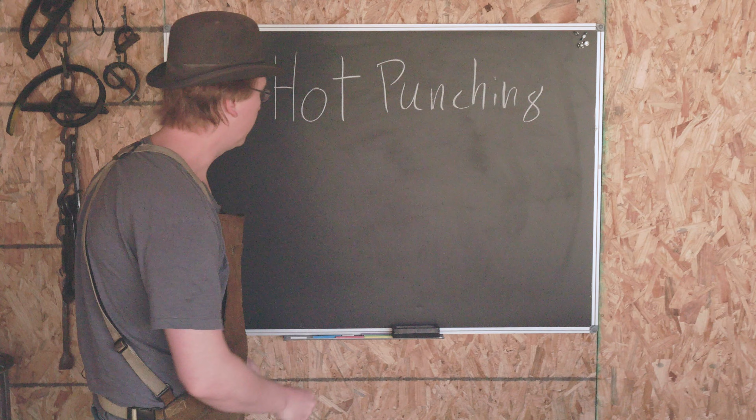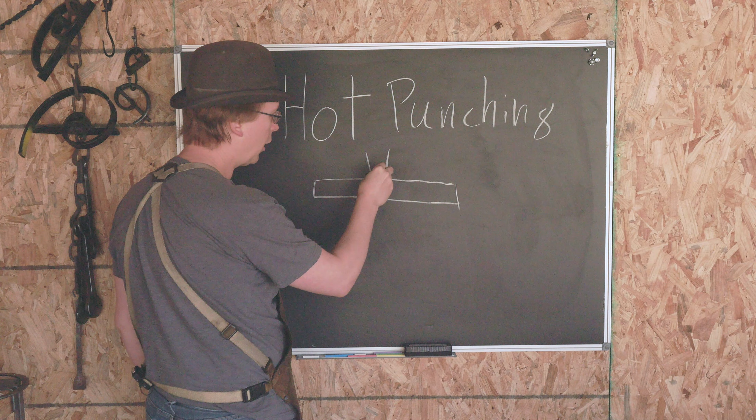So let's take a look at what's going on when we do hot punching. We've got our bar, looking at it from the side here. We're going to come in with our hot punch and shove this material down, all the way down like this.

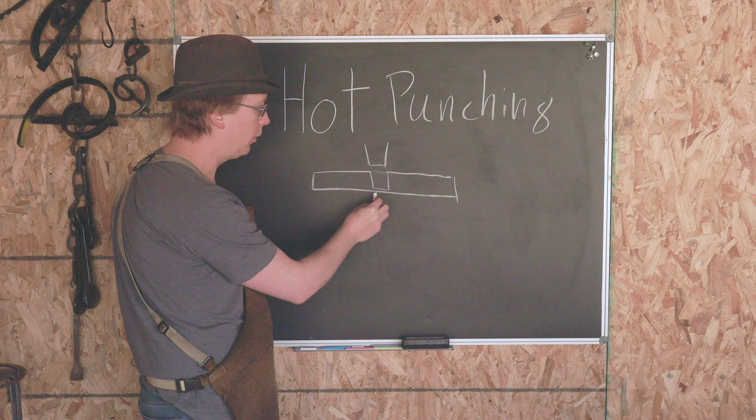Most of this material gets pushed out to the sides. A little slug will be trapped down here at the bottom. What we want to do is hammer all the way down, if we've got our anvil here, until the hot punch is basically hitting the anvil.

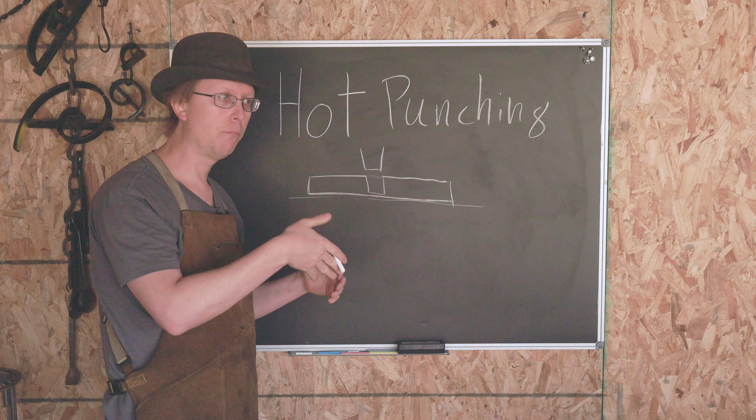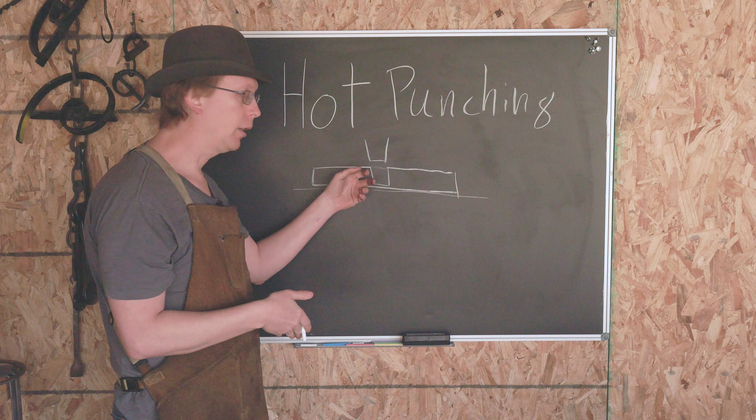When you're doing this, you'll feel like the punch is no longer moving through the metal when you hit it. It will also sound more solid, like you're hammering your punch straight into the anvil rather than into the piece of hot metal. So those are the kinds of things you want to listen for.

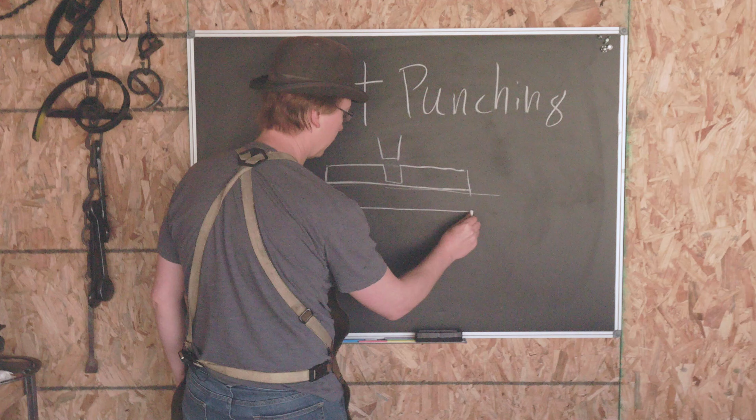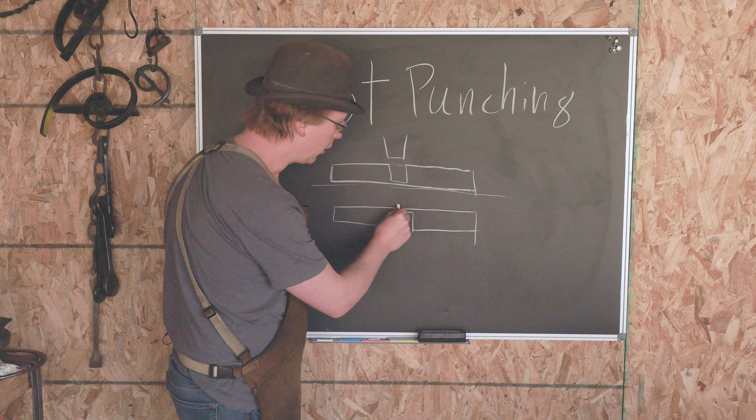Once you've got it to this stage, we're going to flip it over, like this. And then we come in the other direction with our hot punch and push this slug back this way. It's nicer if you do this while the bar is a little bit cooler.

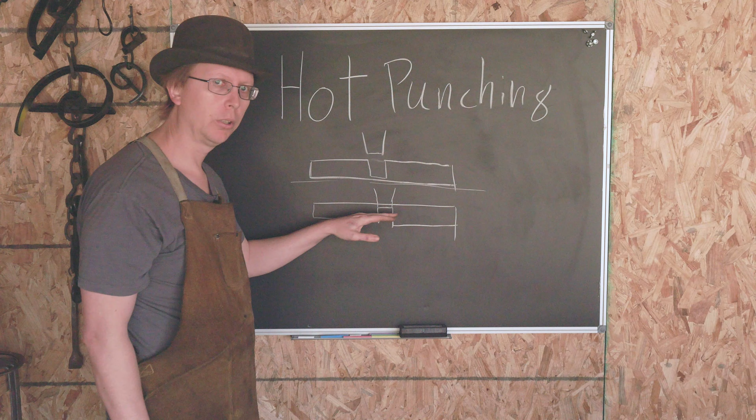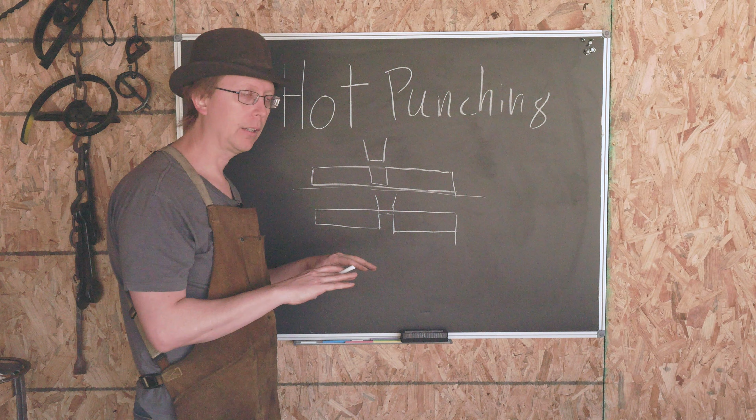What you're looking for here is really kind of a shearing action so that the metal breaks away. If you've got it really hot, it'll stretch more and be a little bit more ragged. So when you're going through the second side, if it's down into a red heat, even a kind of hot black heat, you're going to be okay to knock the slug out.

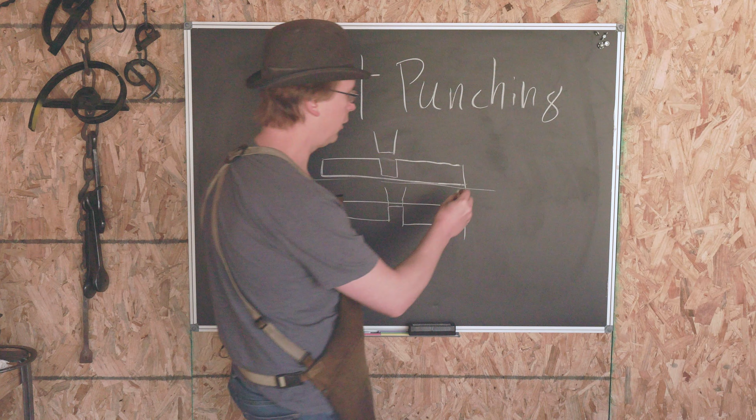Where this can go wrong, if you do it unintentionally, is really when you wind up with this situation. So we've got our bar, we come in, we push the material down, we flip it over.

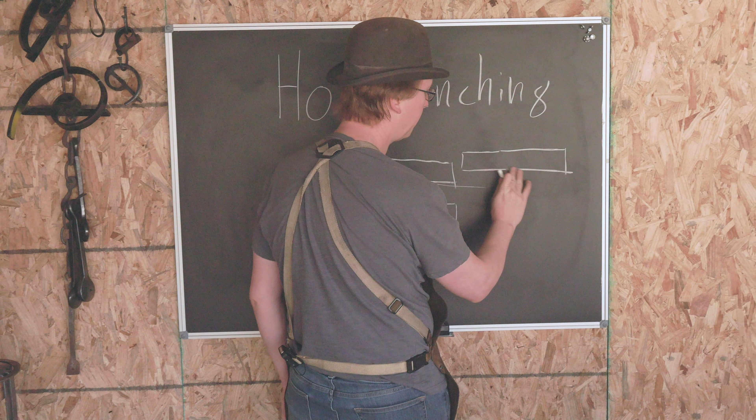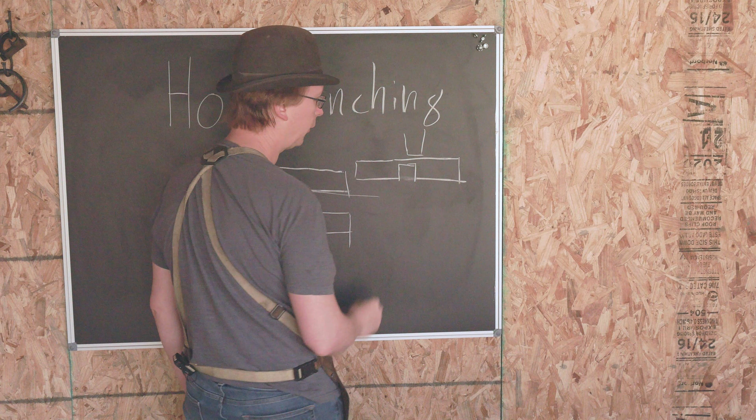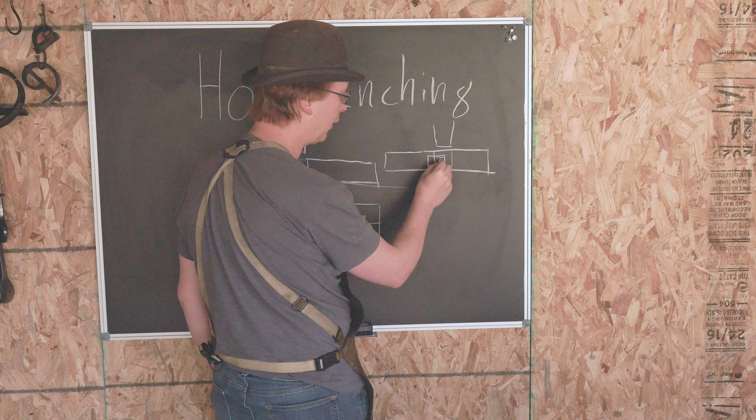So we've got this situation, and then we come in with our hot punch and we're off center. Now we drive this down and it pushes this portion of the material down and kind of this slug, and things get ugly in here. It gets kind of messy, and your hole is not very straight. If you're not meaning to do this, it's a mistake.

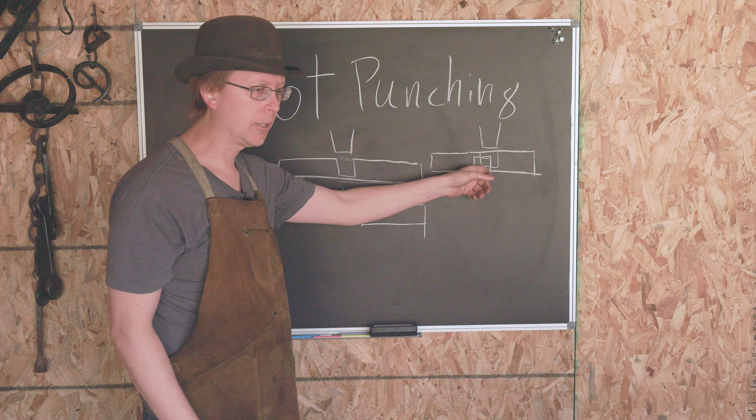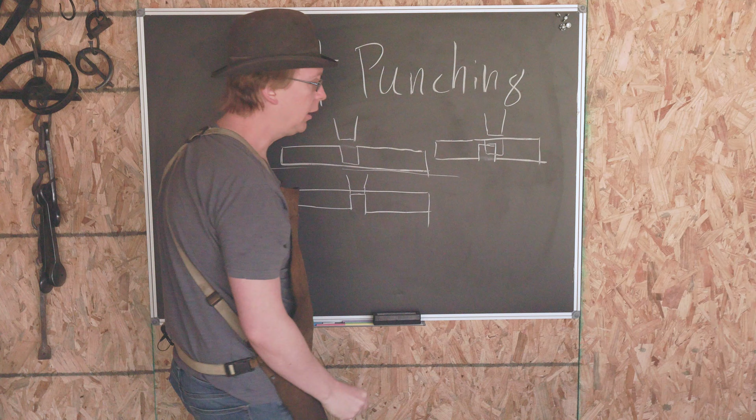If you are looking at passing a bar through at an angle, like if I want to come through with something this way, this is actually a technique you can use to establish angled holes. But for this, and what ABANA is looking for in lesson 2 here, is just a straight hole through.

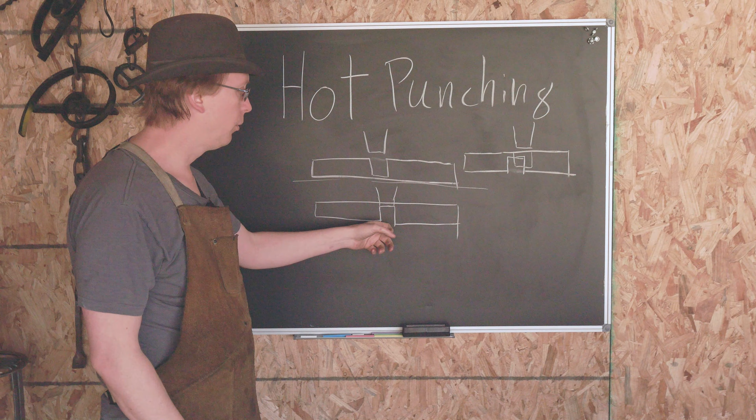Once we've got that hole established, we're going to use a drift to drift it out to 3/8 of an inch size. I'll talk to you guys a little bit about drifting when we get to that stage. But this is the basics of it: hammer all the way through to the anvil, flip it over, go through the other way.

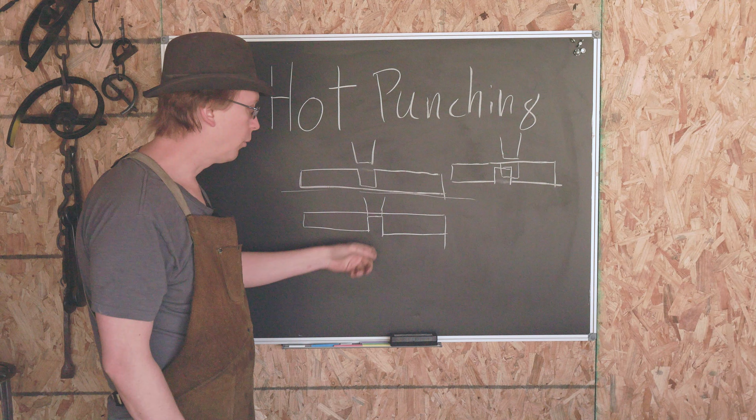When this gets back down to here, you will want to put this over the Pritchel hole in your anvil so that you can knock it through.

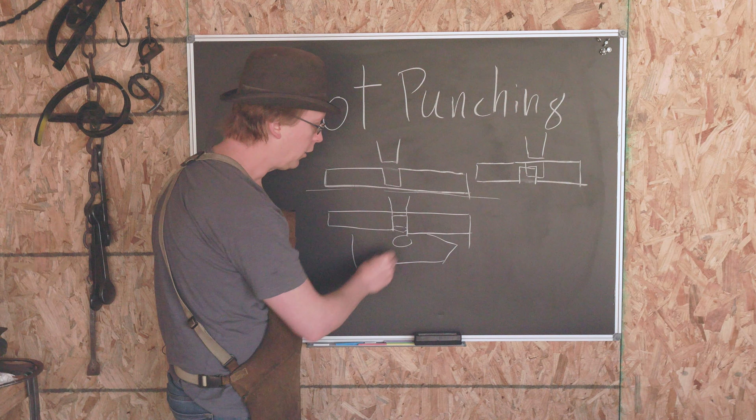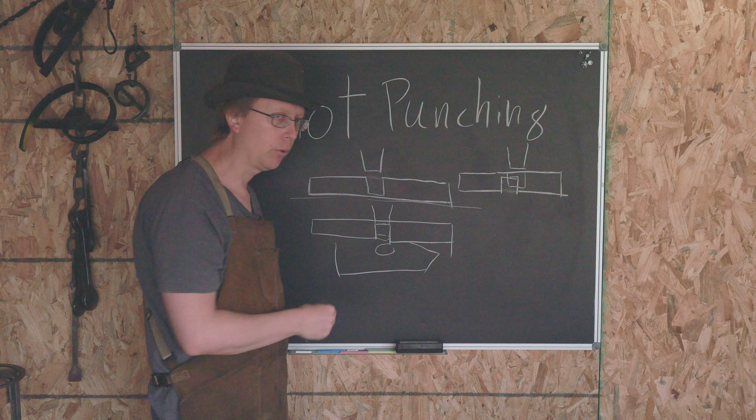One very important note: you don't need this for the hot punching, but for the drifting, you'll need to make sure that your drift can fit through your pritchel hole. For the hot punching, it should fit through unless you're using something that's really a crazy size, because your punch is not going to go all the way into the pritchel hole.

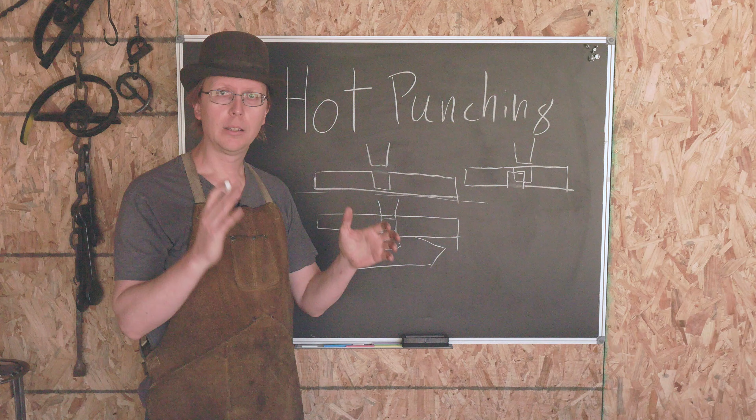So let's get some metal hot and take a look at how this works. We've got the forge heating up. Before we put this in and start getting it hot, I want to put a punch mark in it.

The book calls for about 24 inches of 3/8 by 1 inch stock. This is more like 12 inches, so I'll need to use a pair of tongs holding it. I want to take this and put a mark with my center punch where I'm going to punch this hole. So I'm going to come in right about there.

I'm looking for a pretty good sized mark here that's easy to see. I'll give it one more hit. Now that I've got this established, I can put this in, heat it up, and when I come back out, that's going to be where I use my punch to make that hole.

Our stock is good and hot here. I normally do not wear gloves when I'm forging, but in this case I'm going to put one glove on so I've got a little protection when I'm holding my punch over the hot steel. This just keeps the ambient heat from the steel from making my hand uncomfortable. So let me grab my tongs.

Set the steel. We can see that punch mark, center punch mark. I'm going to put my hot punch right here. Make sure I'm good.

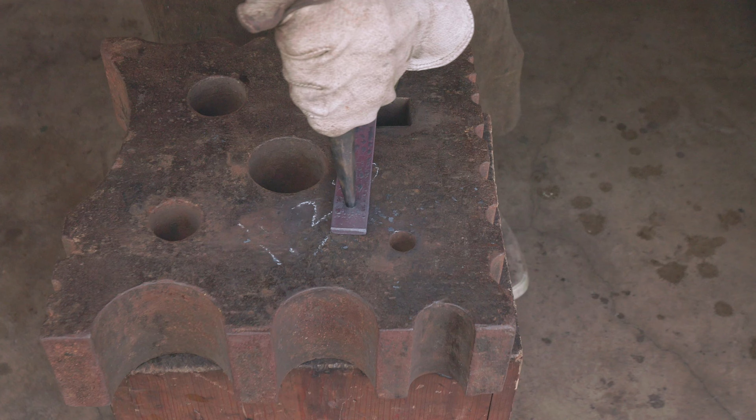Every 4 or 5 blows, you're going to want to take your punch and cool it off, just to make sure you're not messing up the temper.

Let's give this one more hit. That's looking pretty solid. So let's flip this over now, and you'll see right here there's a bit of a flat spot. That's where the punch was driving in from the other side. So I know I'm going to want to come back, put my punch right on that flat spot right there, and then hammer back down.

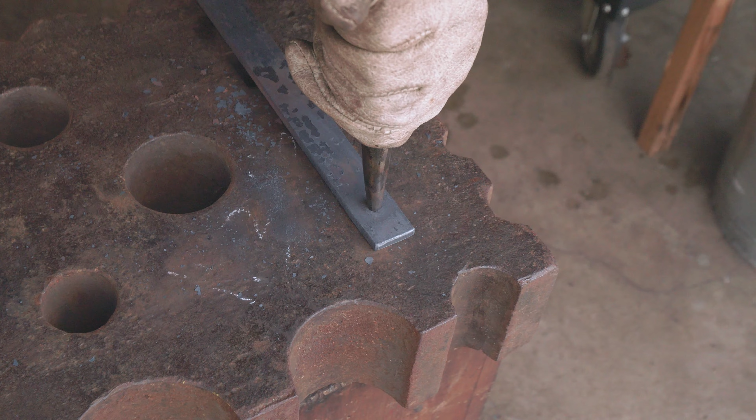That's almost all the way through. So I'm going to put it over this hole. And there we go. As easy as that, we've got our hole here.

The next thing we're going to want to do is drift this to 3/8 inch size. My goal with this practice is that this 3/8 inch round bar can pass right through there. Got a little ways to go, so let's get it hot and we'll drift it out.

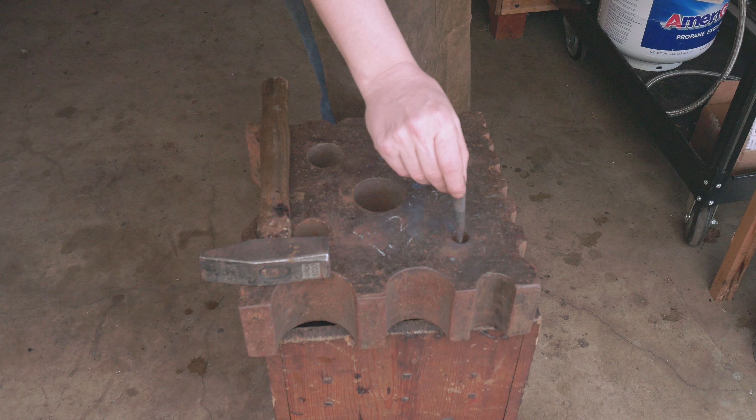The steel is hot, we are ready to drift. I'll put a link to a video on how to make a drift if you need that. You'll notice I'm using a swage block this time. Just picked this up, and that's because my drift will fit through this hole. It will not fit through the pritchel hole on my anvil.

Anytime you're doing this punching or drifting, you really want to support as much of the metal as possible, and really have your hole and whatever you're using as backing material be just a hair bigger than the drift you're making. That way you don't get a lot of bowing and flexing in the material.

So let's pull it out. This is mild steel, the drift, so I can use a normal hammer for it. I'm going to put that right over the hole, drop that in, and you'll notice how quickly that material starts cooling.

I don't want to stress this, so I'm going to knock it out, flatten it a little bit, back into the forge to heat up.

And these drifts, I cannot stress this enough, they are hot when they come out of the metal. Always pick them up with a pair of tongs in order to quench them off before you use them again. So I'm going to quench this. I'll be back with you as soon as that's hot.

Continue drifting this a little bit bigger here. There we go.

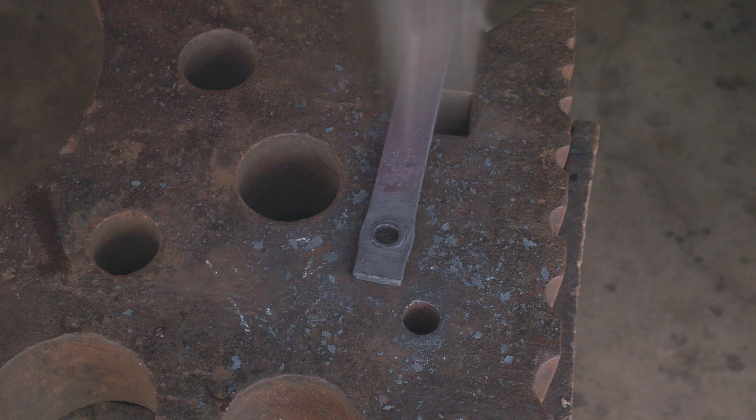And then we'll be ready to test to make sure our 3/8 inch stock slides through there. Steel is hot, we're going to drive the drift through one last time here.

Everything nice and flat. So while this steel is hot, it's going to be slightly larger, right? It expands when it's hot. This goes through no problem. The real question will be, does it still go through when I've cooled this down and quenched it?

So I'm going to jump off, quench this real quick. I'll be right back with you. We've quenched this. I've got a bit of 3/8 inch stock here, and the question is, does it fit through? Look at that.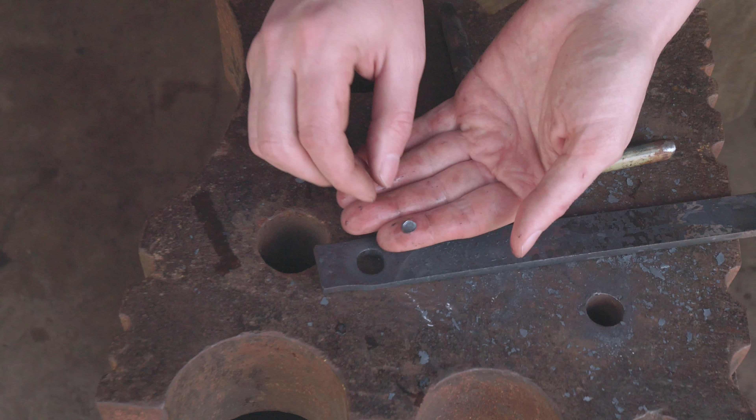Beautiful, fits right through. So we've managed to put a 3/8 inch hole in this stock, and I found the slug that we punched out earlier. Let's see if we can zoom in on that, Gregory. We lost just this little tiny piece of steel here from that giant hole.

One of the big advantages of punching and drifting over drilling is we lost this much steel instead of a 3/8 inch hole's worth of material right here. So a lot more structural integrity in the bar. It also gives you a very classic blacksmith look.

So anytime you're looking at how metal is joined, if you see this kind of characteristic bulging out at the side of joins, it's a good sign that either punching and drifting or slitting and drifting was used in that process. And I've lost the slug, but that's okay.

So that's the goal with lesson 2 in the ABANA controlled hand forging series. Next week, or the week after maybe, we're going to get into drawing out and making a cone instead of a pyramid. So I'll be back to talk with you guys about that soon. Thanks so much for joining me. Happy forging.